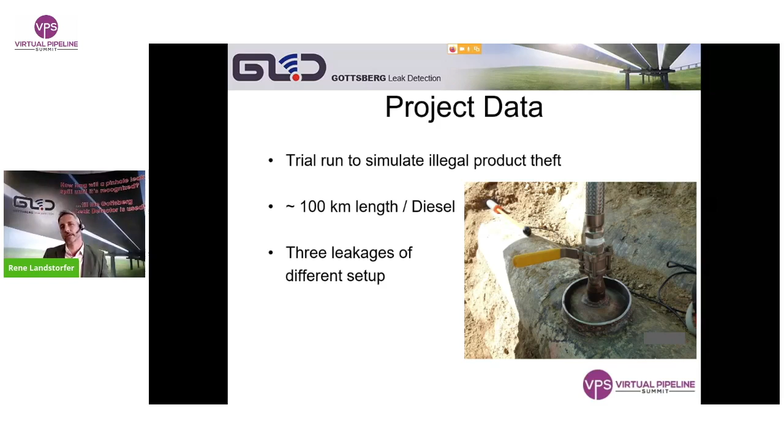What we have chosen for the run was a 100-kilometer diesel line in Slovakia, and 3 different leakage setups had been installed along the line. From our side, we used our leak detection equipment, the GLD 202 leak detector in combination with the GLD 303 chassis. These tools are especially developed to detect very small leakages. In fact, we have a certification from the German TÜV for a smallest detectable leak rate of around 6.8 liters per hour. During the tests, that was a leak size of only 0.2 millimeters. So it's more or less just dropping out of the pipeline.

And these tools are widely used as an addition to permanent monitoring systems, because these are not capable of finding very small leakages during normal pipeline operation. That's why many operators have their permanent monitoring systems, and in addition to that, for the small or pinhole leakages, they are using our leak detection pigs.

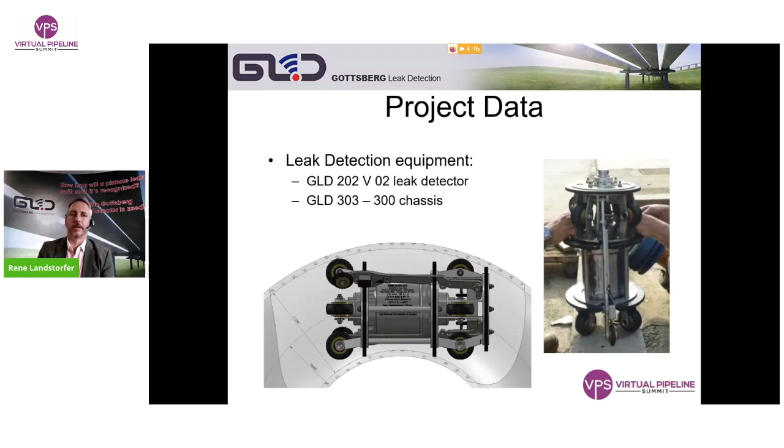So for the trial run, as mentioned, we had 3 different leakage or hot tapping setups. The first one was in a small valve station. It was a DN80 branch with a ball valve, then a 2-meter long DN50 pipe, and at the end of that pipe, a DN15 ball valve again that could control the leak flow, which was around 1.38 cubic meters per hour, equivalent to 16.7 liters per minute.

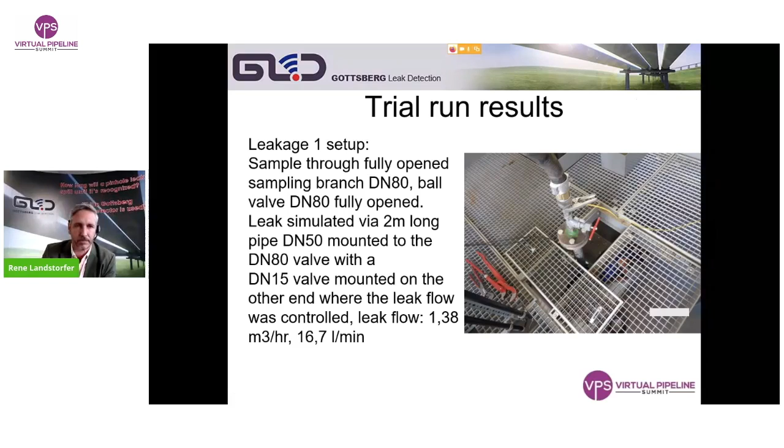The next picture shows our leak detection evaluation. At that point, we could detect the leakage. I'll just switch to a pointer to give you a better idea of what we are doing here. So the software displays our data. We are recording all the noises in the pipeline, afterwards doing a frequency analysis to make precise statements about the origin of any noise.

We are starting here with the very low frequency noises at the bottom left of the screen, and then it goes frequency-wise upwards to the high frequencies at the bottom right. So the green beams are high frequency noises.

And what we are expecting from a leak, or what we are searching for, is the noise of cavitation. When the pressurized liquid expands to the outside of the pipeline, it produces these small cavitation bubbles. And as these are imploding, they are producing a certain noise that is in the high frequency range.

So if we find a signal that has mainly high frequency signals, then we have an option here to take a look at the signal geometry. We can see the loudness and how the loudness behaved during the signal on the top of that window. And if we find something similar to what is displayed here, then we can be sure that there is a leakage. Additionally, we have the locating feature.

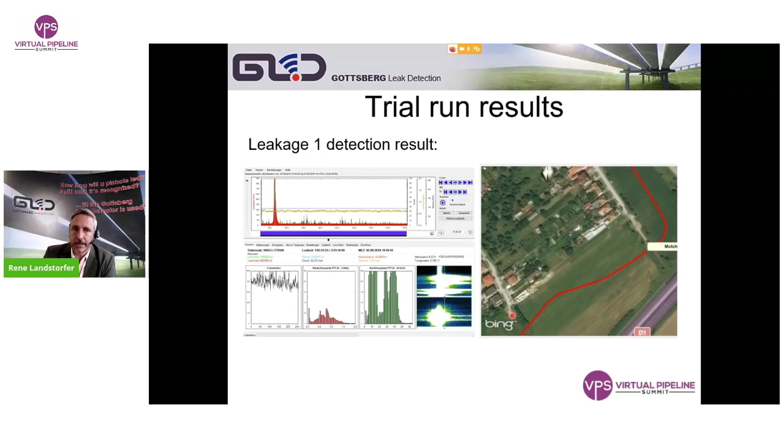Our next leakage was, I just need to switch off the laser pointer. Our next leakage was in the field. There was a construction site at the pipeline, and there a leak has been simulated by welding a branch of DN25 to the line. Then they drilled with a 6 millimeter drill into the pipe wall, and the intention was to simulate a crack by stopping the drill exactly at that point where the first small leakage occurs. So at that moment where the first high frequency sounds occurred.

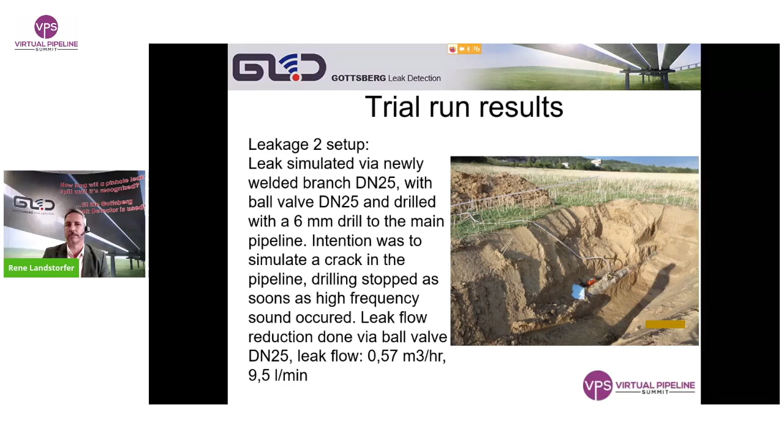The leak flow in that case was around 0.57 cubic meters per hour, and that was around 9.5 liters per minute. And if we take a look at the software, at our data evaluation, you can again see clearly we have those high frequency signals from the cavitation.

Then the signal geometry and the loudness and some other features will give us a clear idea that this is a leak, and also helps us to avoid false alarms, because we can distinguish between those leak sounds and perhaps some high frequency noises that are only harmonics of other noises next to the pipeline. So, for example, the excavator next to the pipeline would produce a completely different signal than a leakage, even though it has some high frequency harmonics in the noise.

So we could clearly detect the leak here. Again, we had a pretty good location feature. Of course, you cannot see the construction site here on the Microsoft Bing map because these pictures are, of course, not updated daily.

Then we can move on to our third leakage setup. This was one which can be found very often in these cases. It was again a DN25 welded branch with a ball valve, 6mm drill again, but this time through the whole pipe wall. And to that ball valve, a 20-meter long pressure hose was mounted. At the end, again, a valve to regulate the leak flow, which was 1.38 cubic meters per hour. That was, in that case, 23 liters per minute.

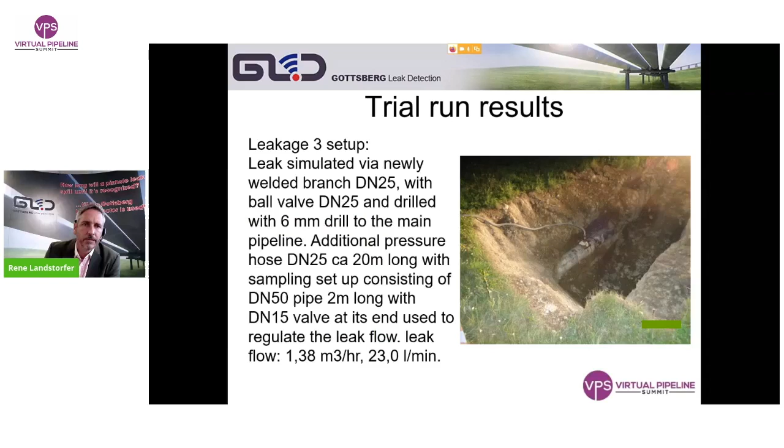The difference in the loudness mainly comes here from the pressure in the line. In that case, it was around 9 bars in the line. If I switch back to the last leakage, it was about 23 bar, and that makes a big difference for the physics of these cavitation bubbles. So the signal is way more quiet, but still clearly can be detected as a leakage.

Again, the location feature was pretty precise at that point. It was also a construction site. So at the end of these trials, we had a good idea on how the leakages change, how the frequencies slightly change from one setup to the other, how the noise loudness changes from one setup to the other, and we could clearly detect all of the 3 leakages.

So all in all, it was a successful trial, and we now have a little bit better idea on how the noises behave in the field.

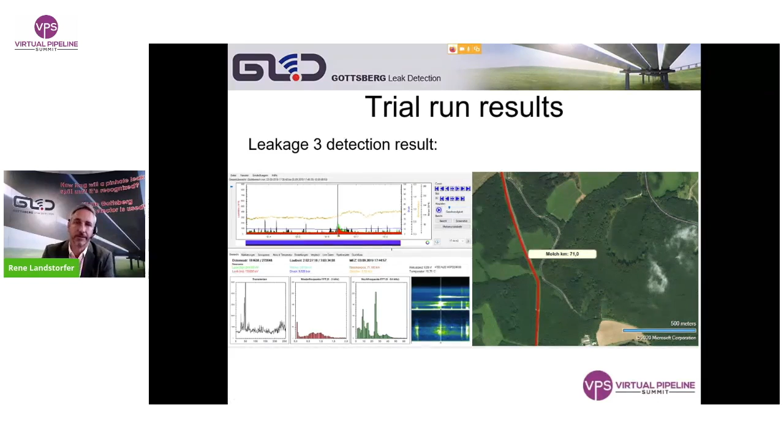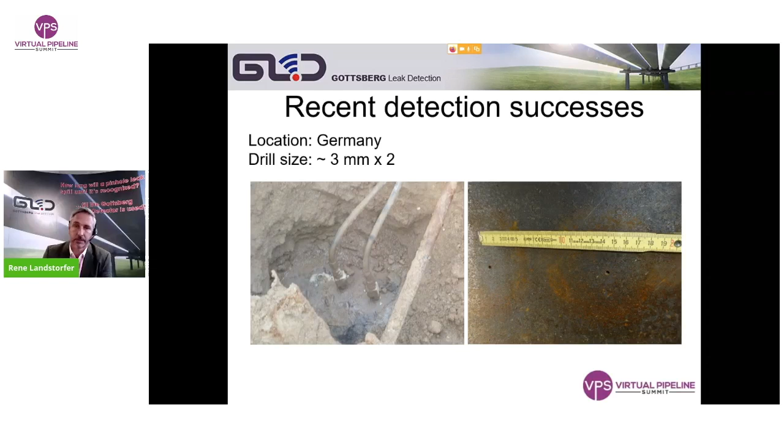They are drilling more small holes instead of one big hole to avoid being detected, for example, by intelligent pigging. They try to stay below the threshold of different leak detection methods to avoid being caught. The next one is a slightly bigger hole. This was around 2 centimeters, and they used an already existing construction site where a part of the pipeline was changed. And they just covered the spot where they had drilled the pipeline during the days, and then dug it up at night to steal some product.

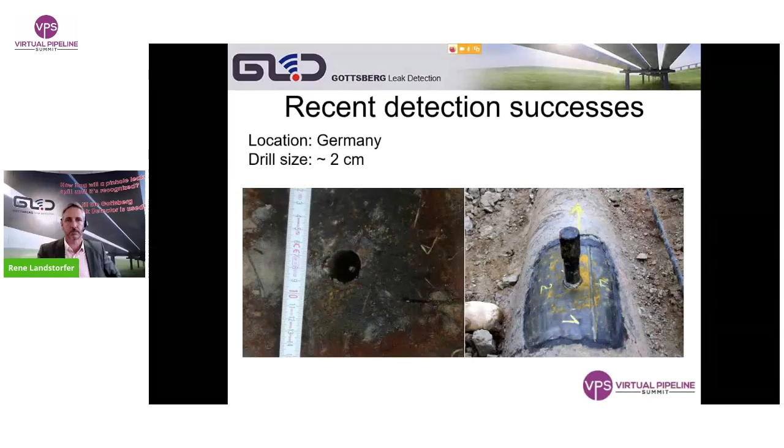The third one was in Southern Europe, where we did a regular leak detection run with our tool and detected a leak. So we had a leak alarm. An intervention team had been sent out to the line, and they discovered a hose coming out of the ground at the location we detected. And this one was around 600 meters in length, leading to a place in the woods, which was covered by trees, so you could not detect anything by a drone or helicopter at that point. And that was the place where they siphoned the product into a truck to steal it and bring it away.

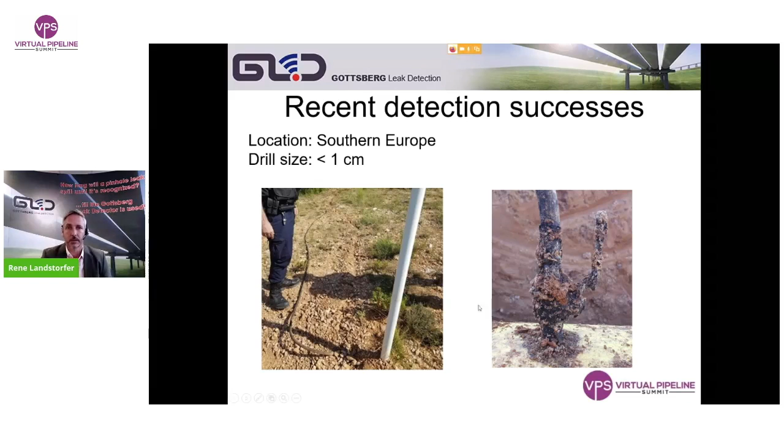We have one from Michael Shora, who asked, we have found and reported during our corrosion inspection drilled holes with diameters of 2 to 5 millimeters and a 1/2-inch pipe installed over it for product collection and transport. Could this be detected as well, considering the comparatively small diameter? Yes, this could be. Normally, the diameter of the pipeline and the diameter of the hole don't affect the leak detection abilities, mainly because it's nearly impossible to drill such small holes that they cannot be detected by our system. As mentioned before, the smallest leak tested with the German TÜV was a leak size of only 0.2 millimeters. It depends a little bit on the pressure of the pipeline, but in general, 2 to 5 millimeters are no problem. Perfect, thank you.

One from Heinz Watzke here. He says the only disadvantage is that your system functions only when product is taken. When valves are closed, there's no indication of location. That is true. That's the drawback of the system. As mentioned in the beginning, the tools are often used in addition to permanent monitoring systems. These permanent systems give a permanent overview, but cannot detect the small leakages during operation, whereas we do not have a permanent overview, but can find even the smallest leaks.